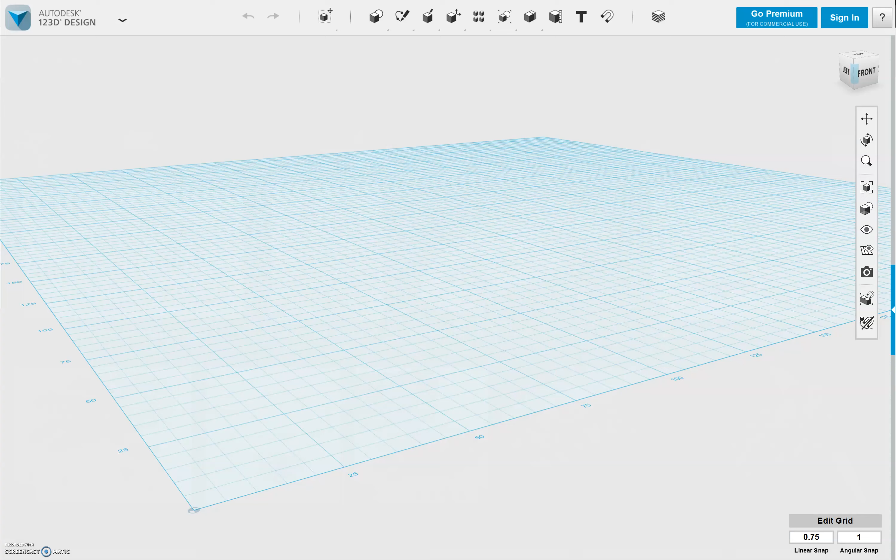All right, so today we're going to make a little Millennium Falcon in 123D Design. I'm going to start by going to a top view for myself, then pan over and zoom out a little bit.

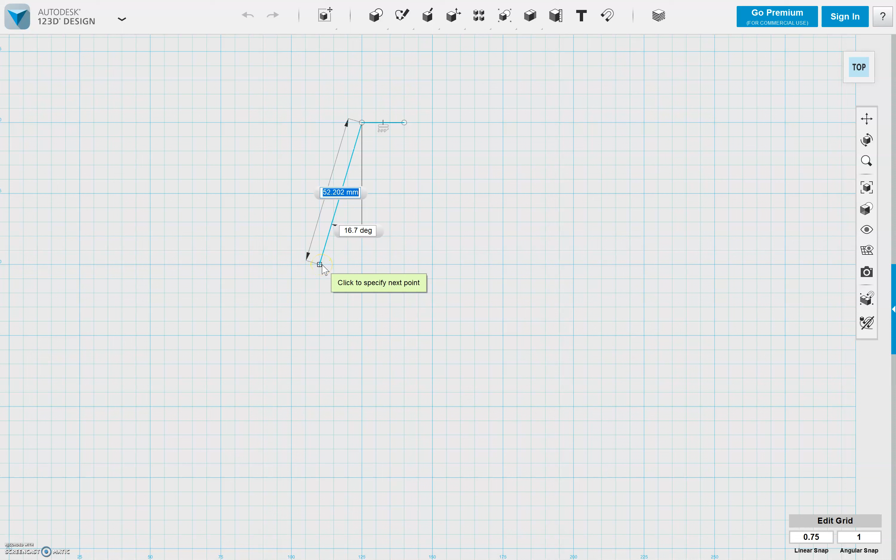I'm going to start by drawing the front part. I'll start right here. You need to use the grid here to your best advantage, otherwise your measurements are probably going to be off. So we got that there.

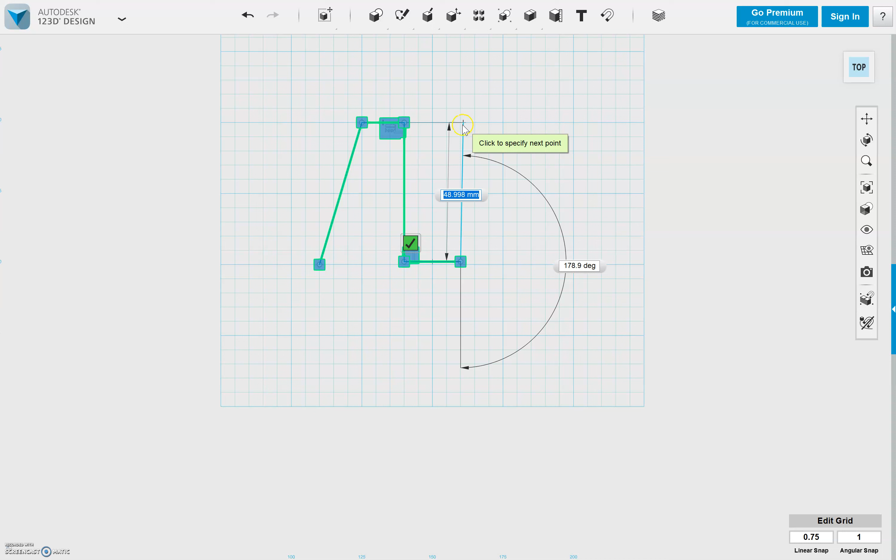Now we're going to go back to polyline again. We're going to make sure we reattach to this existing drawing and edit an existing drawing. We'll specify our first point right there, then come down, shoot over, go back up, over, and then down to there. One side's slightly higher than the other, but I'm not going to worry about it.

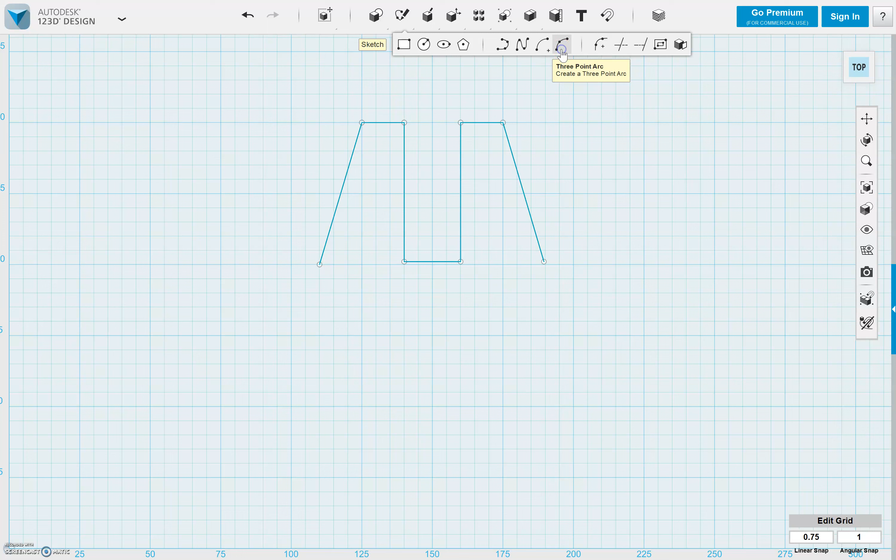Now I'm going to use three-point arc. We're going to edit existing sketch, so click here, edit sketch. Now specify the start point of the arc, the end point of the arc, and give ourselves the body of the Millennium Falcon. There we go.

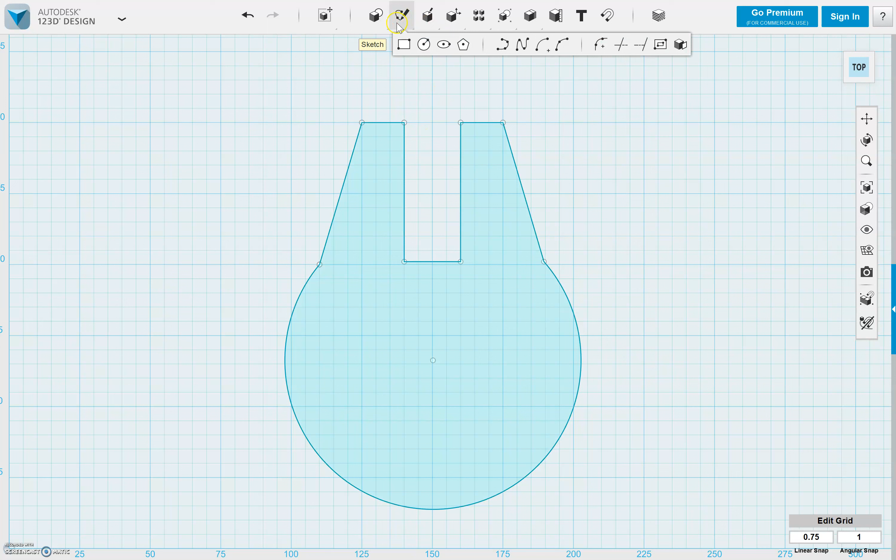Now I've got to draw this little part that goes in the front here, this little guy. So I'm going to use my existing sketch here. I'll just sketch a rectangle real quick and easy here, click here, go to there, and then zoom out a little bit and go up.

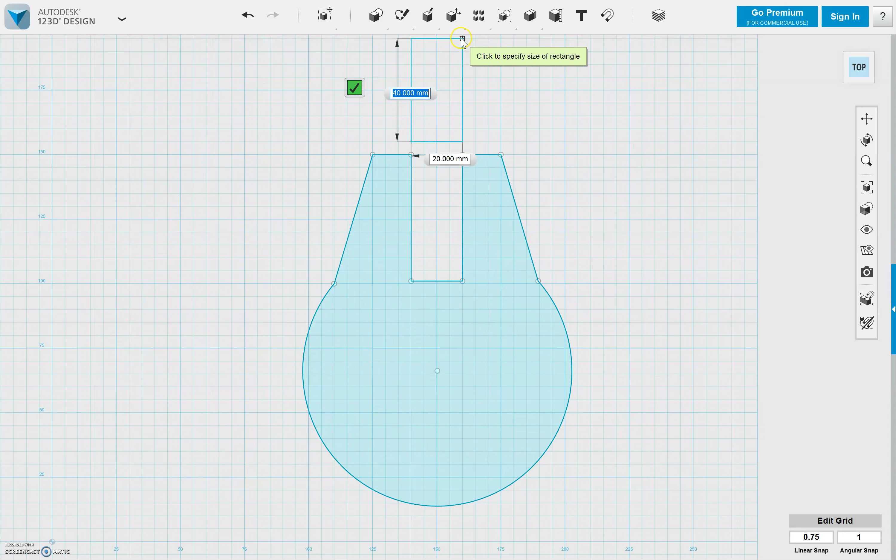We want that to be 15, I believe, right? Let's see here. Oh, it needs to be closer to 20. All right, that should do it right there. So let's go to 20. There we are.

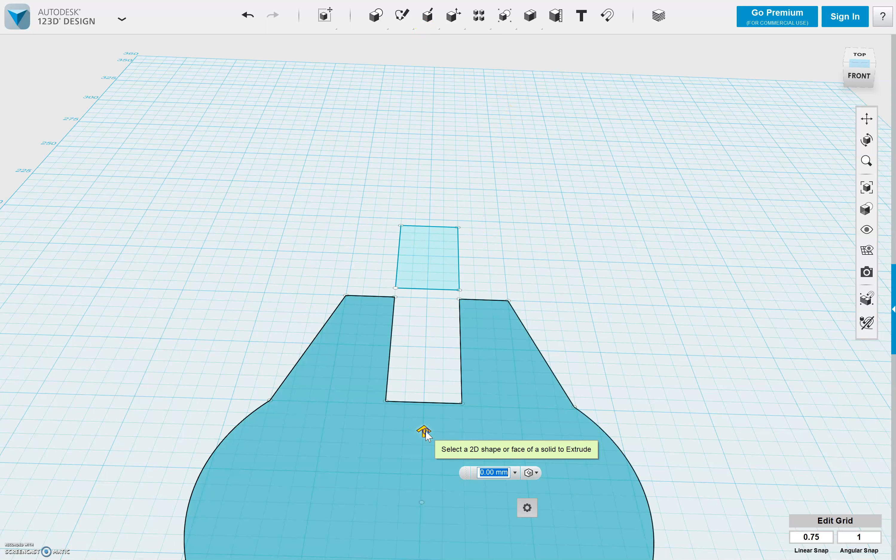Now it's a simple matter of extruding. So I'm going to click here, go to my construct menu, and extrude this up. 25, that looks good to me.

I'm going to click on this and extrude it as well. We're going to take this one up about 5 millimeters. That's good.

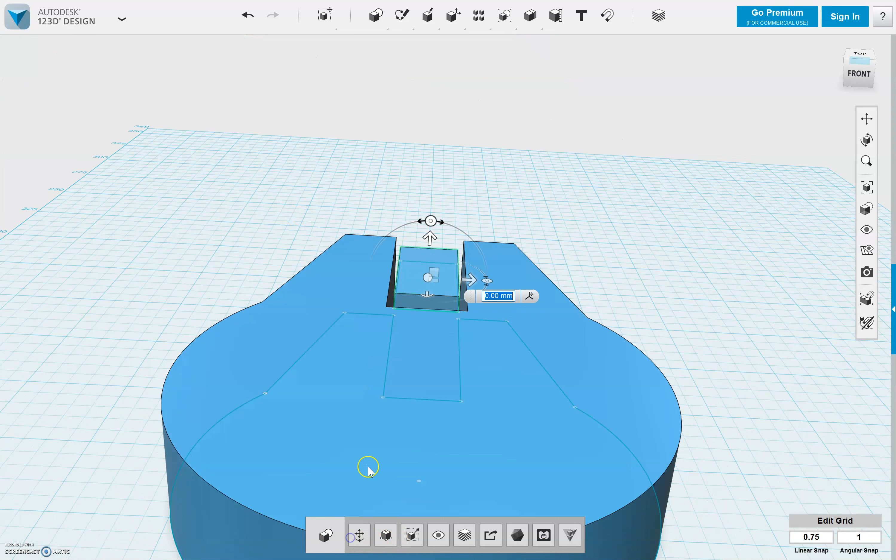Now we're going to move this into position. I click here, click my move option, move it up, and then move it back. Here we go.

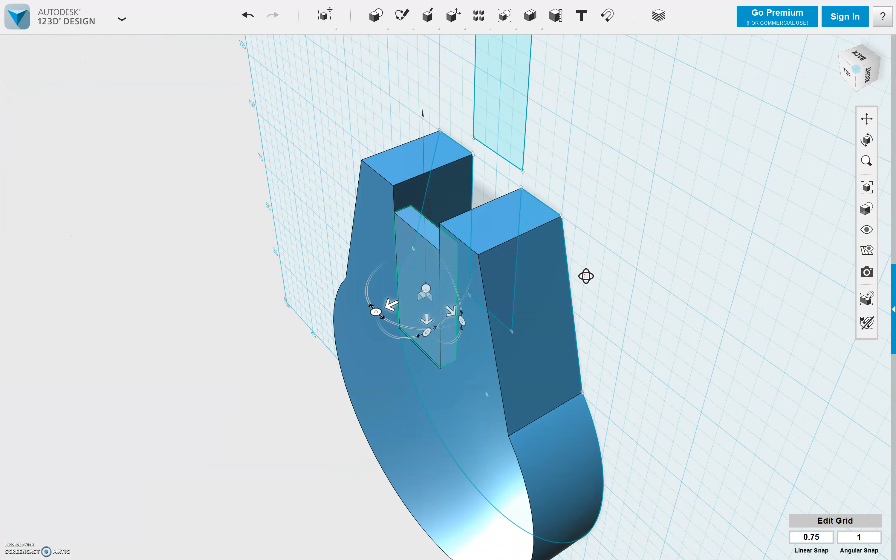There we go. Now let's rotate around and see that this is actually in position the way we want it. Looks like it needs to come up a little bit. There we go, okay, now it's mostly in position.

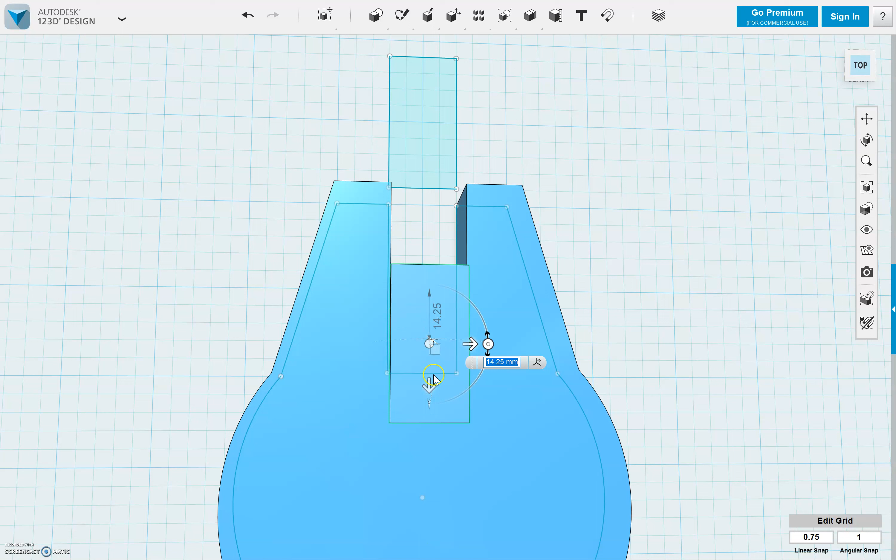I'll move this back here, and let's check it against our original here. That looks pretty good. Let's give it a little bit more space here, pull this back a tiny bit more. There we go, and that's pretty much the look we're going for there.

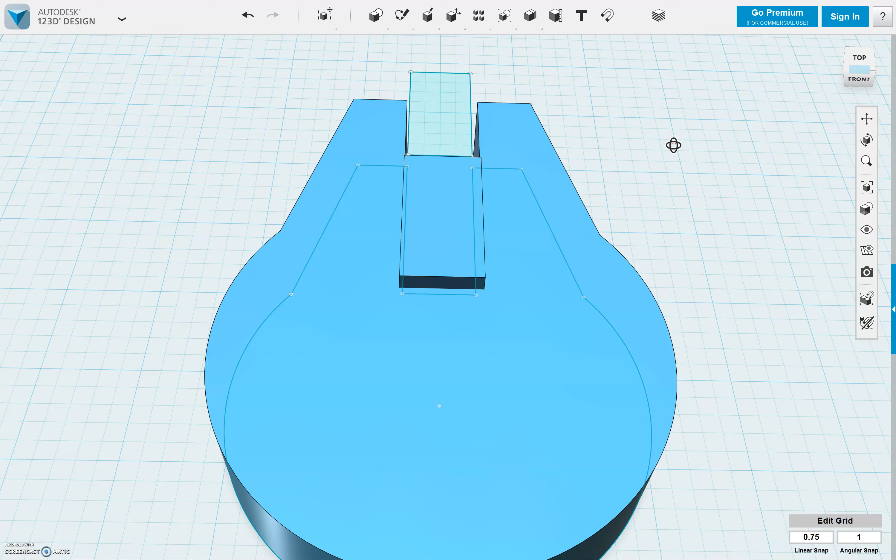Okay, now we're going to add a circle in the middle because, as you see here, you've got this circle, and then we'll add our little cockpit there for the pilots. All right, let's get a top view one more time. I'm going to sketch a circle.

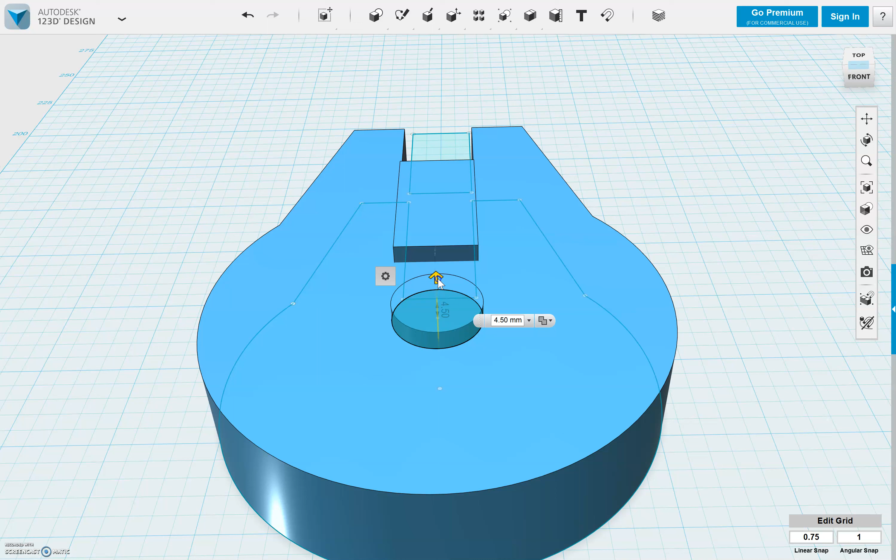I'm going to sketch it right here in the middle, and I think that'll do it. Exit mode, go here, extrude this guy up. We'll do it 4.50, again, that's good. Now I just have to add the cockpit and do a little bit of chamfering to make this look a little bit more like a ship.

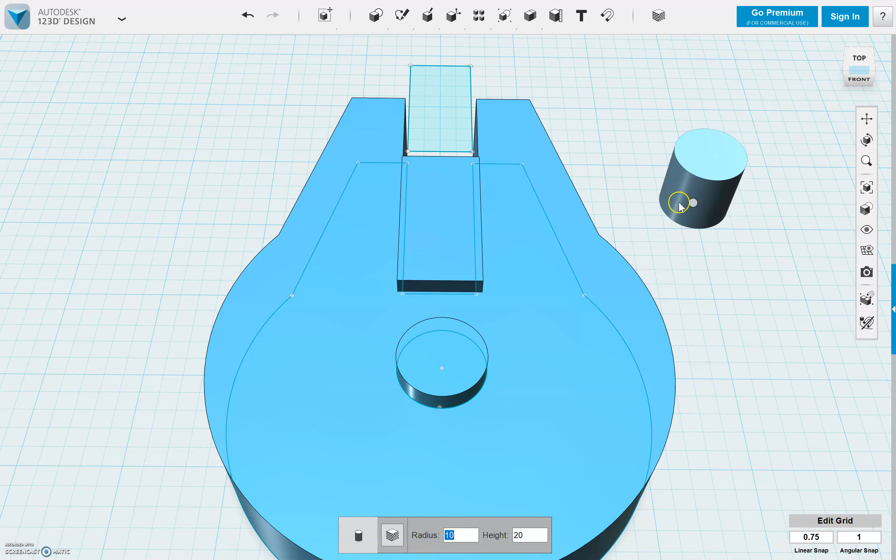And we should have a rough copy of the Millennium Falcon here. So I'm going to take a cylinder, radius 10, height 20. Yeah, that should work actually.

We'll keep that one there. And then I'm going to get another one, but this one is going to be height 45.

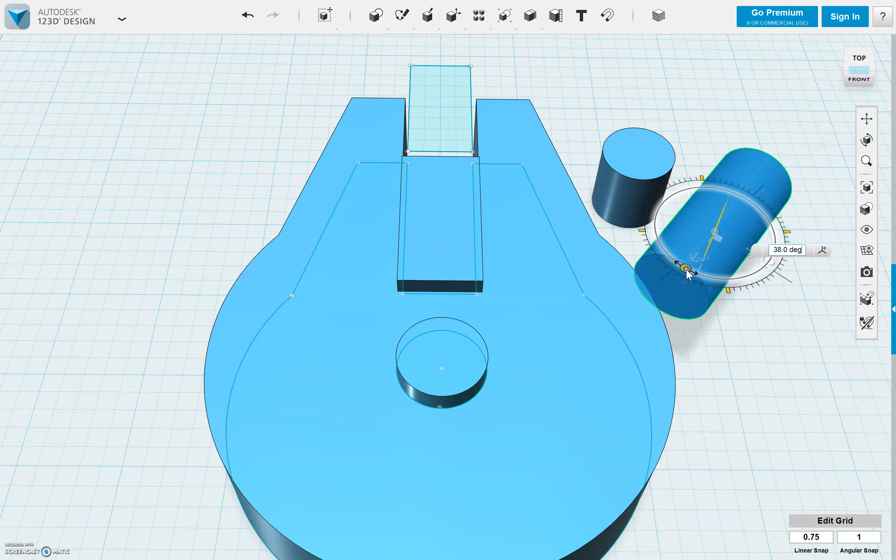All right, so from here, I'm going to take these, once again I'm going to move them. So we're going to flop this guy over by going 90 degrees, and then we're going to turn it 45 degrees this way. Maybe 38 degrees, how about that?

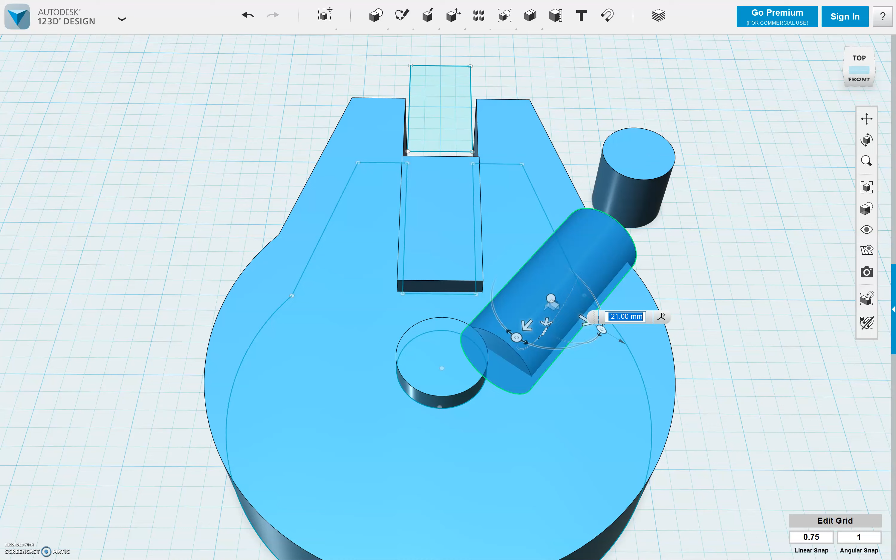I'm going to bring it into the ship, and we'll bring it over as needed. Let's see here, let's compare this to our original, where we've got it kind of forward and coming out like that. Okay, so let's go to a top view.

We're going to just move this up like so, and I'm just going to call that good. Okay, now we have to do the same thing with this guy here.

So I'm going to click my move tool again. I'm going to click on this, and this needs to get rotated 90 degrees. There we go.

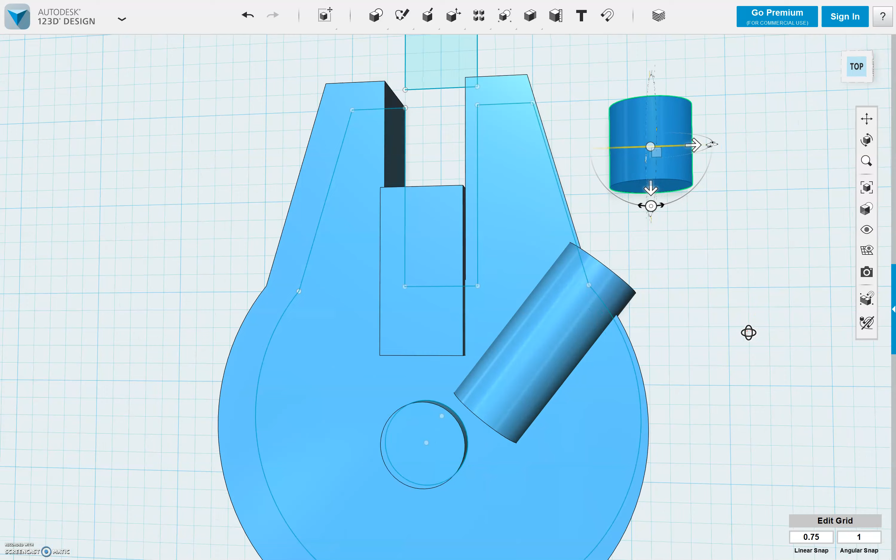From here, I'm going to click on this arrow, and I'm going to bring it up, and then I'm going to rotate around and make sure that, here we go.

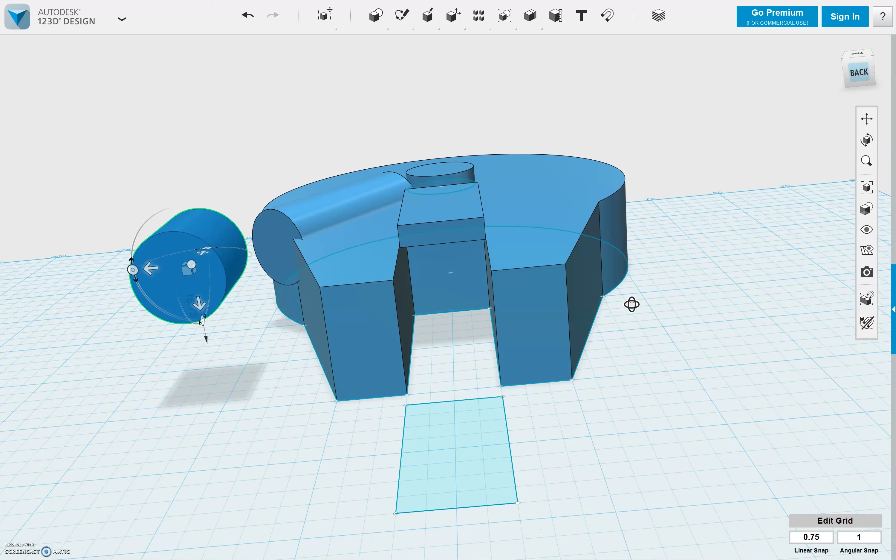Let's flip myself over. There we go. That's the view I want. Let's move this over a little bit more, move it down, and then move it into place.

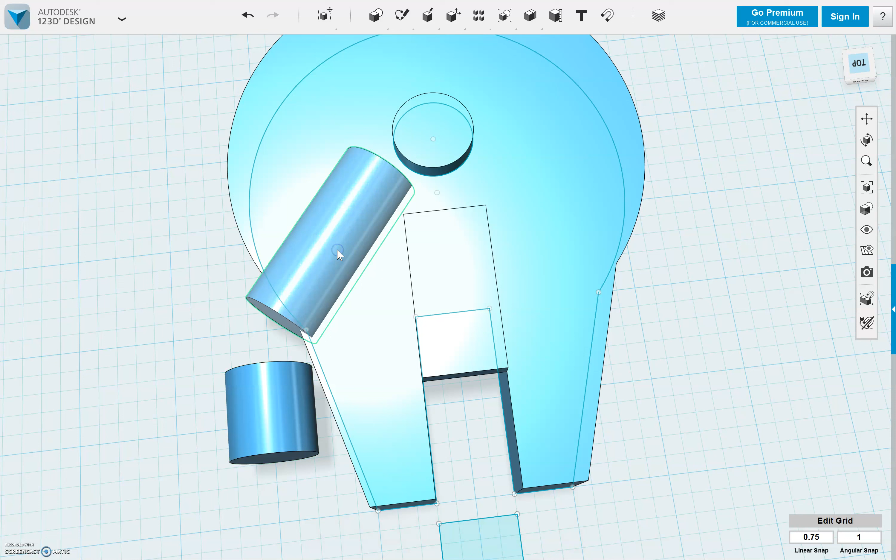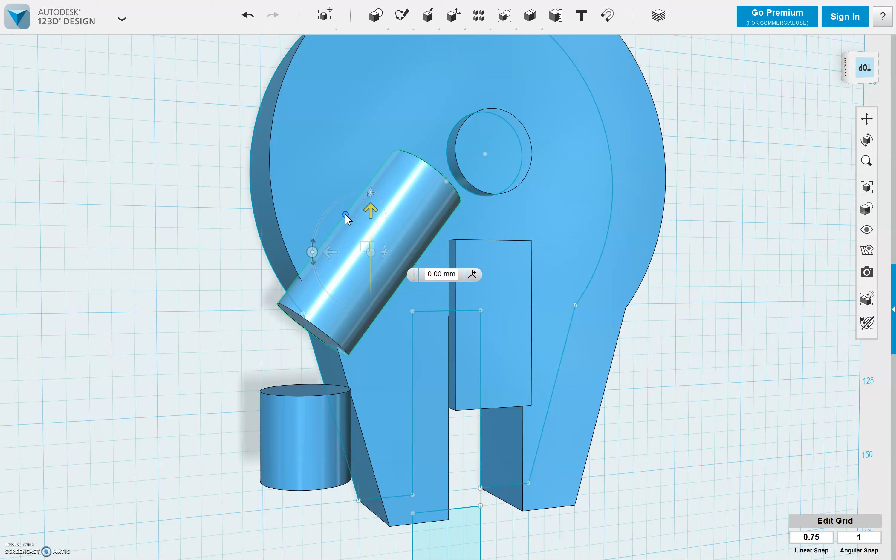Now it looks like this is a little bit too close to the Millennium Falcon. So I'm going to click on this guy and bring it out a little bit more. All we got to do with this is pull it this way here, like so. Bring that up and then out.

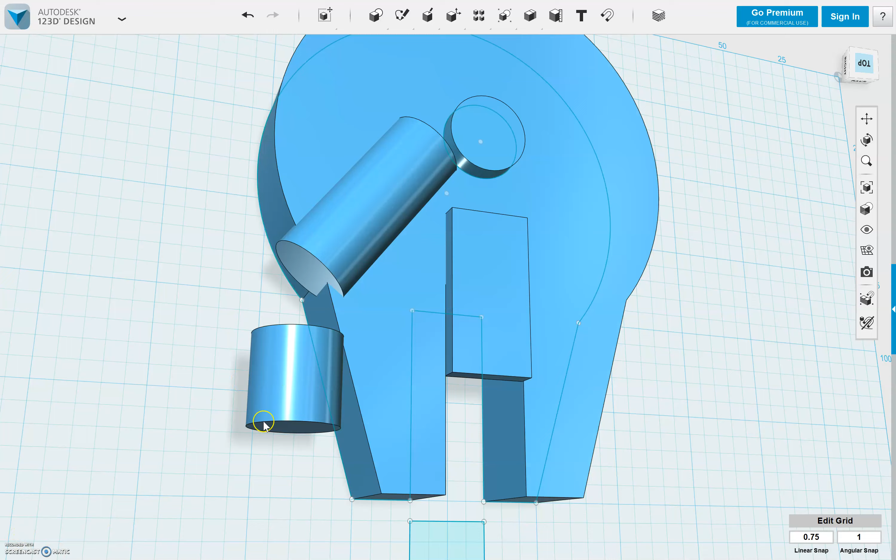Okay. Sorry for the view change there. I'm going to click this guy in the middle and move him out a little bit more. Then we'll go back to this front, and we're going to move it over. There we go.

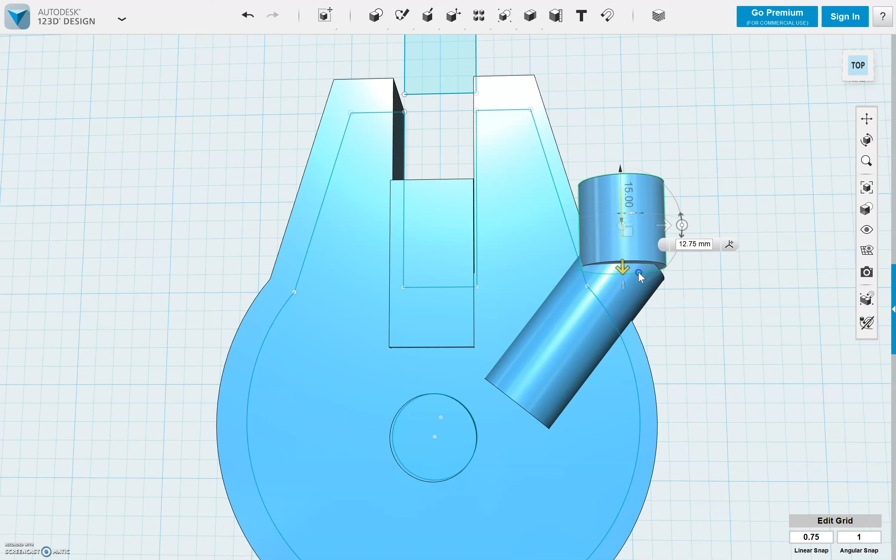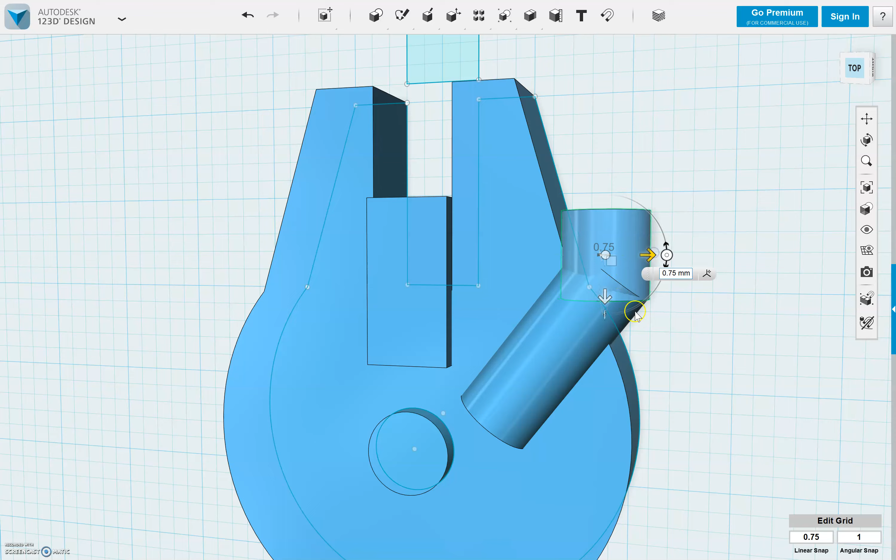And frankly, that's not too bad for a rough draft. So we're going to take this guy down a little bit more, like so, to make it match up as perfectly as we can. Then we'll just bring this guy out slightly. At this point, it's just making some little tweaks here with our move tool to get everything looking the way we want.

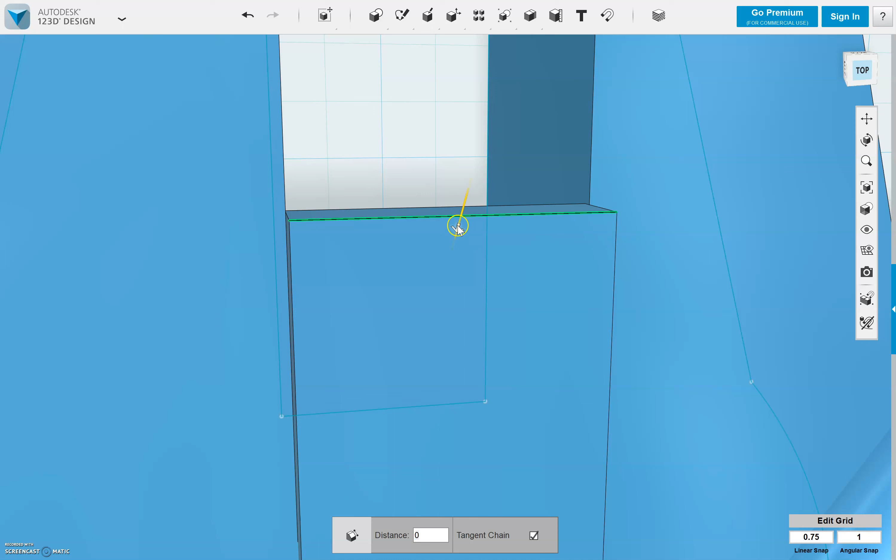Voila! All right, now the last part is to chamfer this stuff. Chamfer is this tool right here, and what you do is click the edges. You want to zoom in, select an edge, and then pull that edge down to give it an angled appearance. It's like fillet, but angled. This is what's going to give it a sort of spacecraft-like appearance.

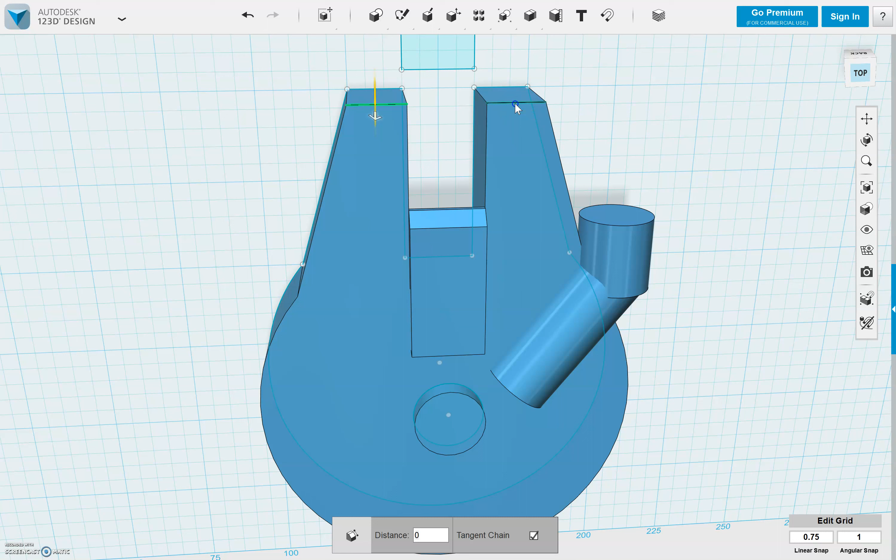So we're going to take chamfer and chamfer these edges here and here. You can select two edges to do it at the same time if you'd like. I'm going to give this a little bit of a chamfer here, and I'm also going to chamfer the cockpit. So we're going to go chamfer, select this edge right here, and then pull that down.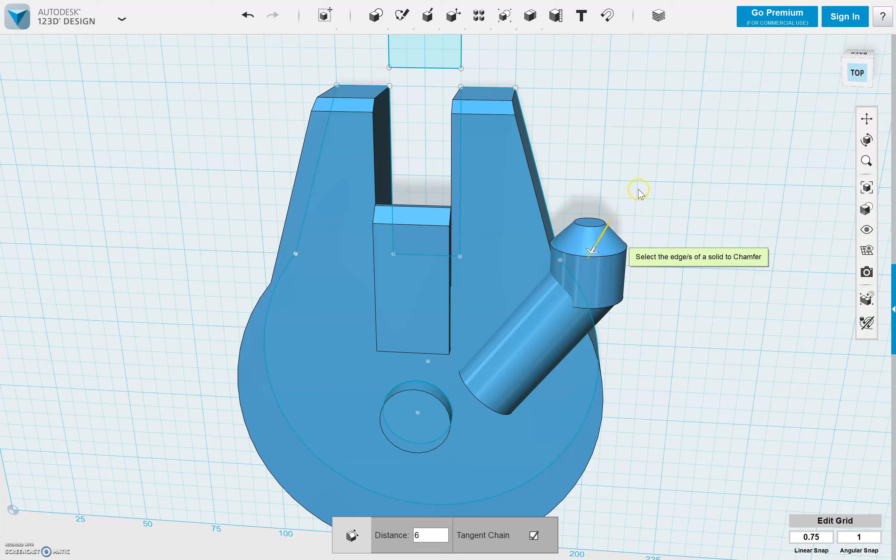There we go. Now that looks like the cockpit of the Millennium Falcon. That's pretty good, yeah, that's pretty good. Let's check out our original here. Okay, it could actually maybe be a little bit more pointed even, but not bad.

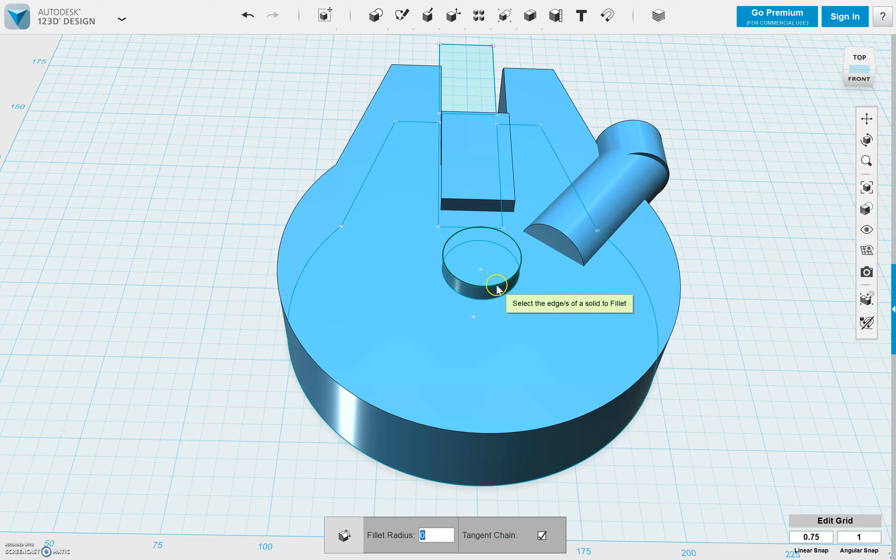Same thing here, you're going to fillet all the edges of this. So I'm going to go here - we've chamfered, so now I'm going to switch over to fillet, hit the edge of this, and round it a little bit. There we go.

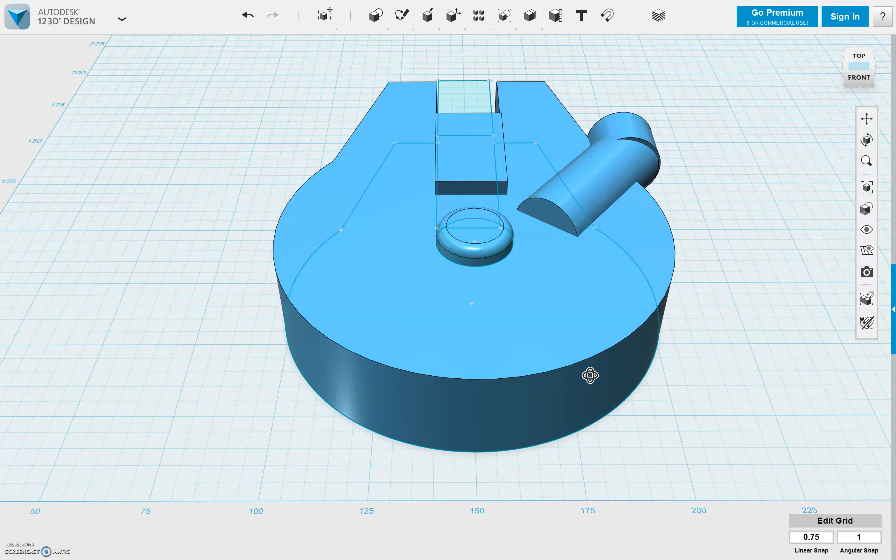Let's take a look at our... okay, so this kind of disappears into the top of the thing. So what we'd really need to do is add a second circle here, make it bigger, which we can do in just a second. But in the meantime, let's finish a little bit of chamfering here.

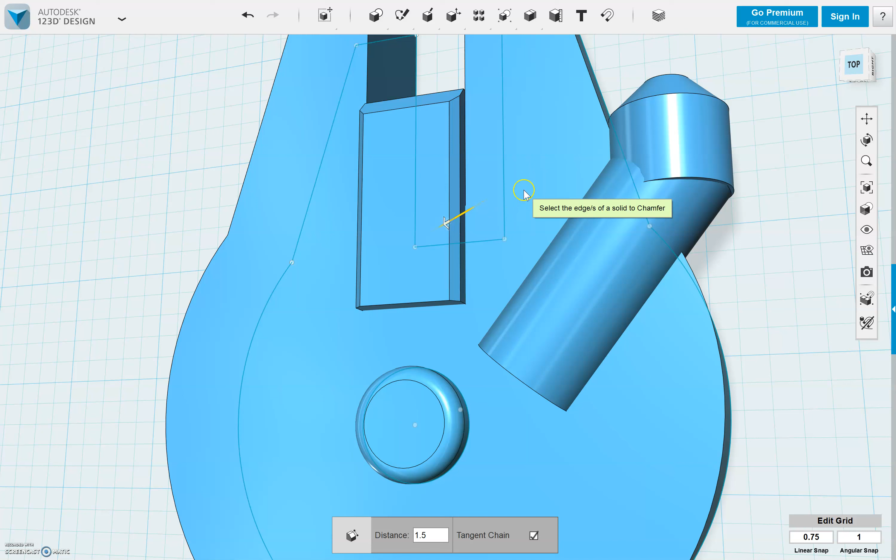I'm going to go here, chamfer this edge and that edge. There we go. I just pull this down. There we are, that's good.

And now last but not least, let's give it another circle here, kind of pop this whole thing up. Actually, oh yeah, I won't put those in for now - that would be a bridge too far. We'll just, as a matter of fact, I'm just going to chamfer the edge of this and see what it looks like, see what we can do here.

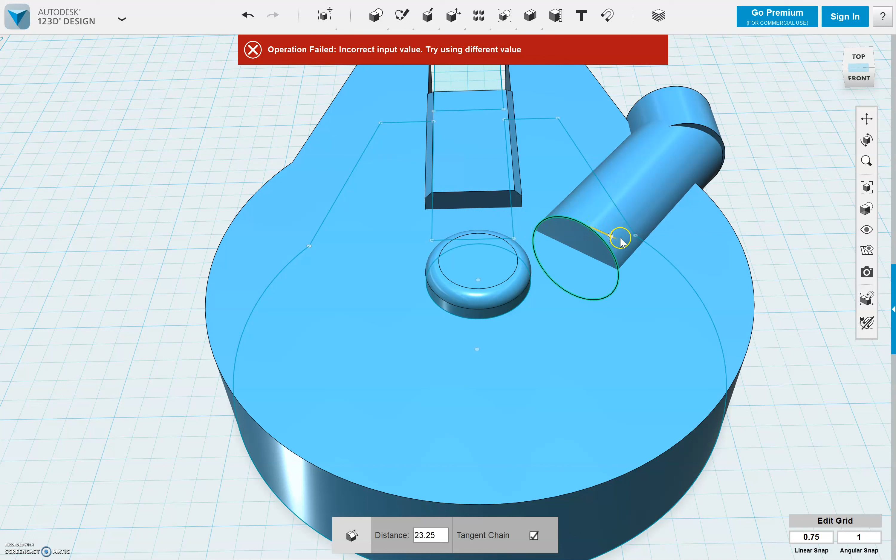Ooh, interesting, I like that. I can actually make it disappear, so I'm going to do that. It's telling me it's an invalid option, but they don't know. Here, we're going to chamfer, go here, and I'm going to... there we go. Now it sort of looks like it disappears into the top of that, and I didn't even have to add any additional stuff.

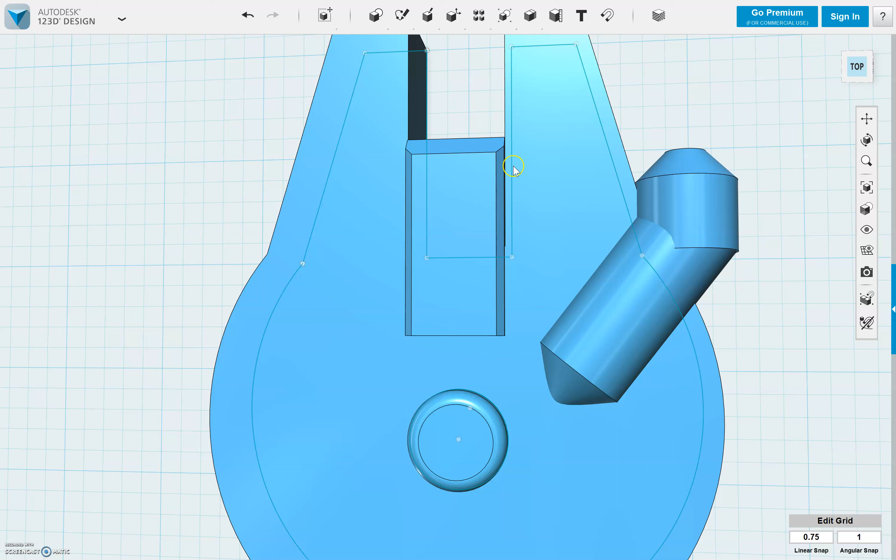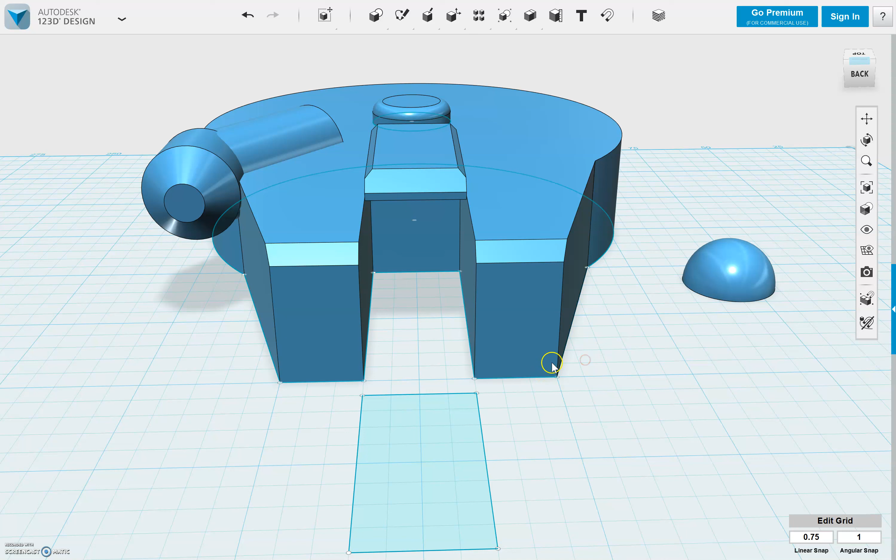So there you have it, that's a kind of a quick and dirty Millennium Falcon for you. You could do more chamfering and more filleting. It'd be really easy to add a satellite dish if you wanted to - you could take your hemisphere right here, snap it to the top, and shell it out, and you'd have yourself a little satellite dish. So from here, it's just all about adding those little details to make it look more Millennium Falcon-y. But that's a pretty good little outline of how you can make a quick one for yourselves. And there you have it.